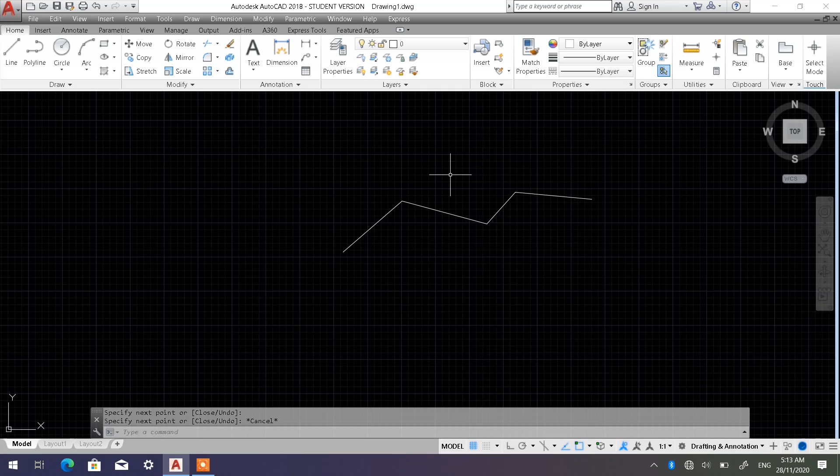Okay, layer ini, okay, layer yang escape to exit from the activity. Layer ini adalah layer yang berwarna putih. Okey. Kalau kita sebenarnya satu saja layer berwarna putih dan nama layer ini adalah kosong.

Sebenarnya kita boleh tambah lagi layer-layer tersebut dengan pergi ke layer properties. Ingat layer ni berada under home tab. Kita ada banyak jenis tab kan? Tetapi layer ini berada pada home tab dan di sini okey, kedudukan layer tersebut. Sekiranya kita nak tambah layer, okey, beberapa layer ni, kita boleh pergi ke sini, layer properties.

Okey, so layer properties manager ni akan terpapar. Okey, di sini seperti mana telah saya katakan kepada anda sebentar tadi, dan saya akan expand this a bit. Okey, so ini color dia white dan jenis garisan ataupun line type adalah continuous.

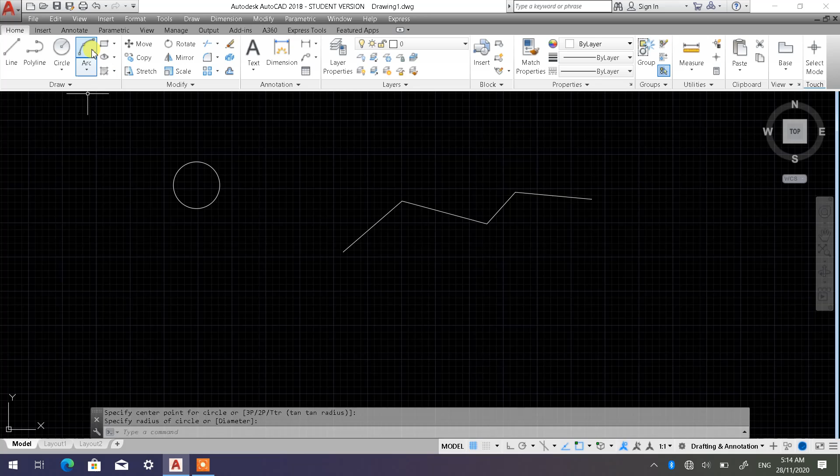Okay, that's why kalau kita perhatikan dia, kalau kita buat circle ke ataupun arc ke, okay, garisan ini adalah merupakan garisan berterusan. Garisan objek ini sebagai objek garisan yang continuous.

Alright, so seperti mana yang telah saya katakan sebentar tadi, sekiranya kita nak tambah lagi layer, we can go to layer properties. Dan kalau diperhatikan pada bahagian atas ni, dia ada beberapa new layer. Kita ada new layer, VP frozen, okay, in all viewports, delete layer, and also set current.

So I just want you to focus on, for the time being, on the new layer. Okay, so new layer mana kita nak tambahkan layer pada bahagian sini. Okay, so let's kata choose this one, new layer, and then you can just leave it as layer 1 or you can rename it. Okay, you can rename it. Let's say I'm going to rename it as let's say green.

Okay, green means that I'm going to change this to, instead of white, I'm going to change it to green. Just click this one and then you can choose any green. I'm going to maintain with this green color. Then once after you choose that particular of color that you want, then just straight away go to OK button. There you are. Okay. It's not necessary to name it as green.

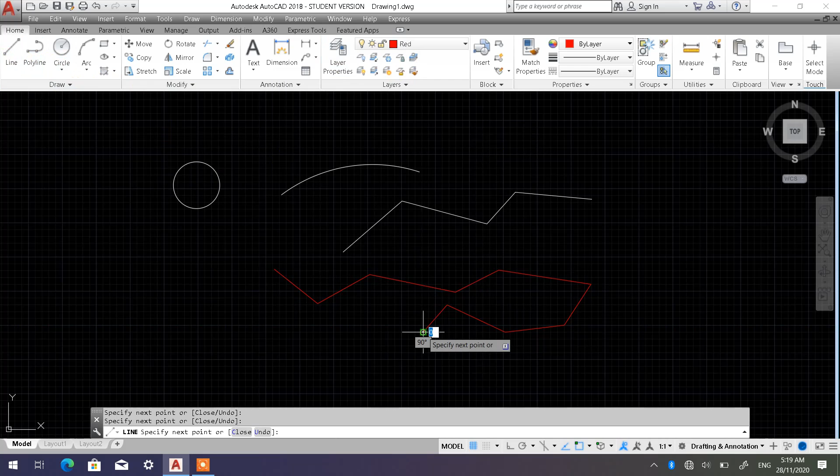So bila you close this, and let's say if you play around with your sketches, dia akan berwarna merah. Why? Because kita dah pilih merah dan continuous, dan juga continuous line. Okay, so you can play around with this one.

Now, cara kedua, itu cara shortcut, ialah very easy. You just need to expand this arrow, click this one, dan pilih terus yang mana you nak. Let's say I'm going to change back to zero layer, zero with continuous line. Just click this one, and then straight away you can play around. Same as well as this one.

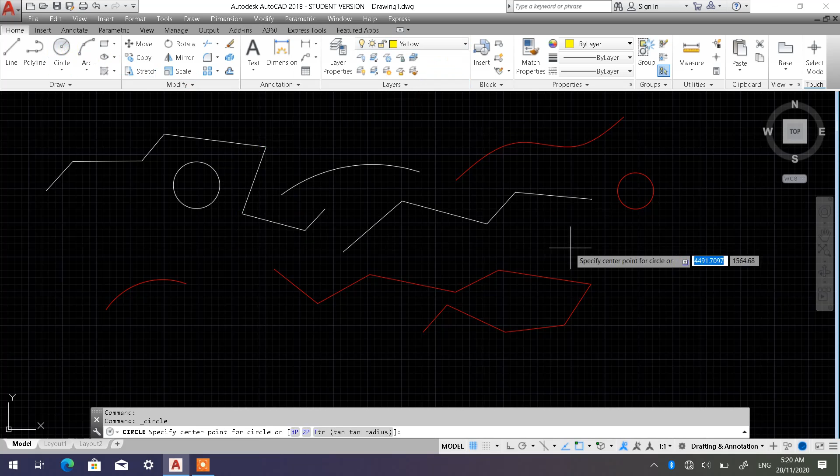Katakan I nak pilih yellow pula, click this one, go to yellow, and then you can play around with those sketches that you would like to create. It's very straightforward. Again, just green, since kita dah buat green kan. Okay, so kita lukis je lah green juga. There you are. So you can have all these, you can try to play around with these layers later on.

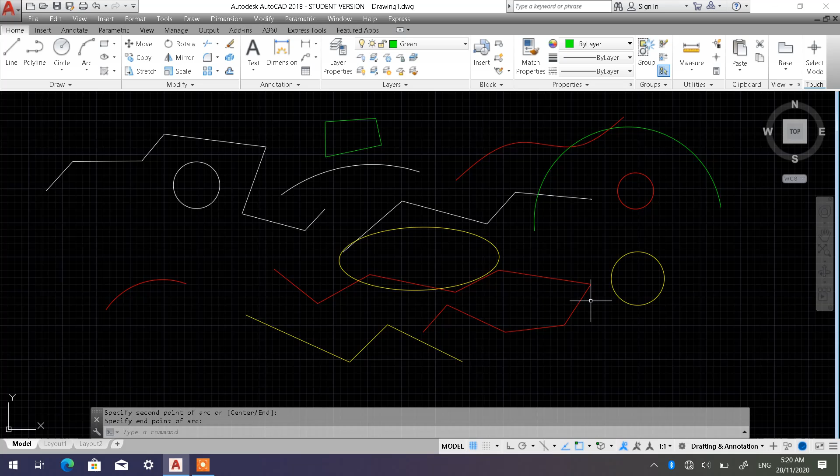Okay, I'm going to shift this to the side first, because I would like to show you how we are going to change the line type. Just now I already showed you how we are going to play around with the layers. As far as you're concerned, this type of line is known as object line, and it is a continuous line type.

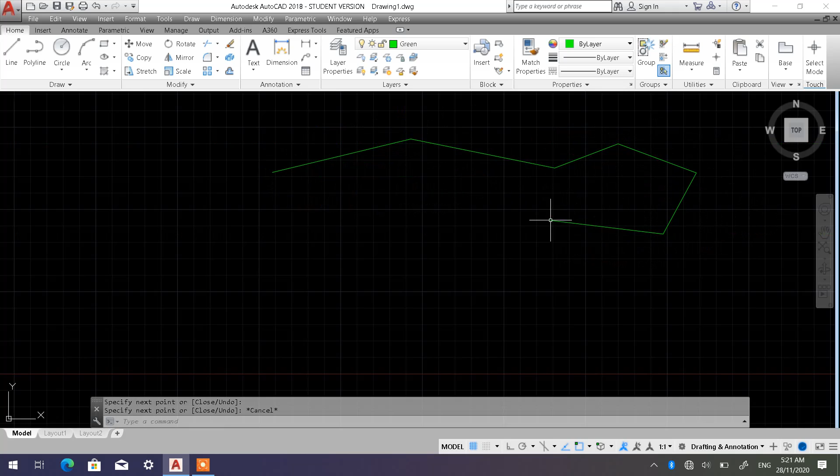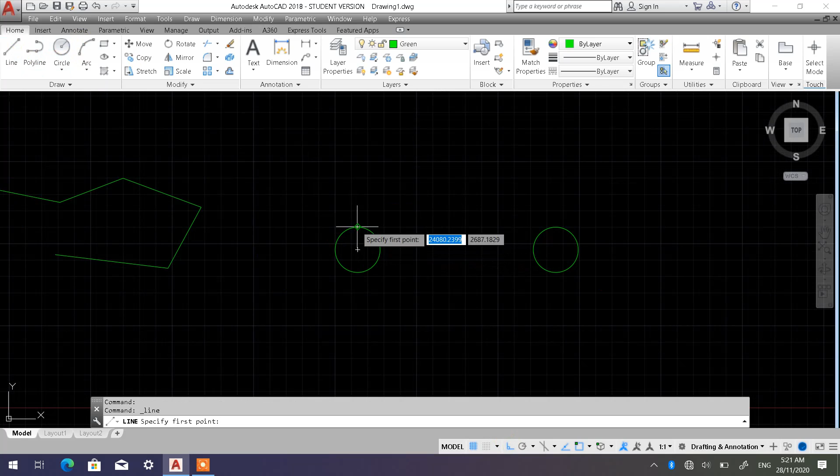So let's say katakan kita nak create, normally kalau kita create a circle like this, I just simply draw without any dimension. And let's say I'm going to copy out this one. I'm going to make sure my ortho is on. Let's say somewhere around here, I just would like to create a simple part like this.

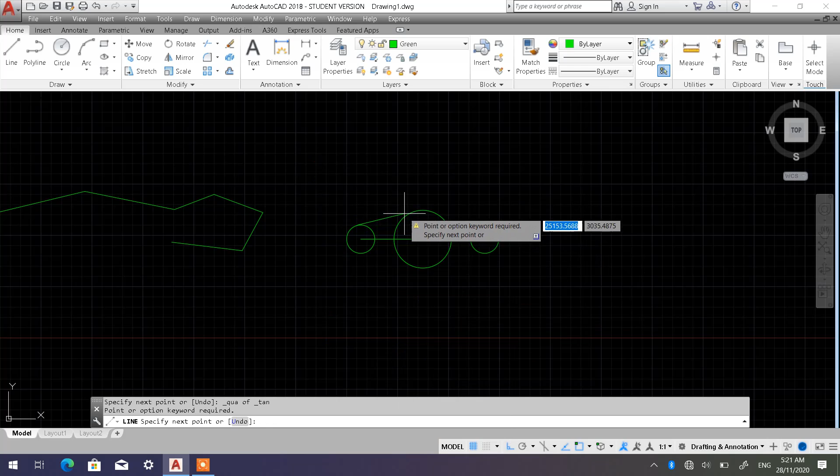And let's see, I'm going to have another circle at the middle of these both circles, and then I'm going to have a line here, tangent, and also tangent. Need to have a tangent here. Okay, press escape, and then I'm going to mirror.

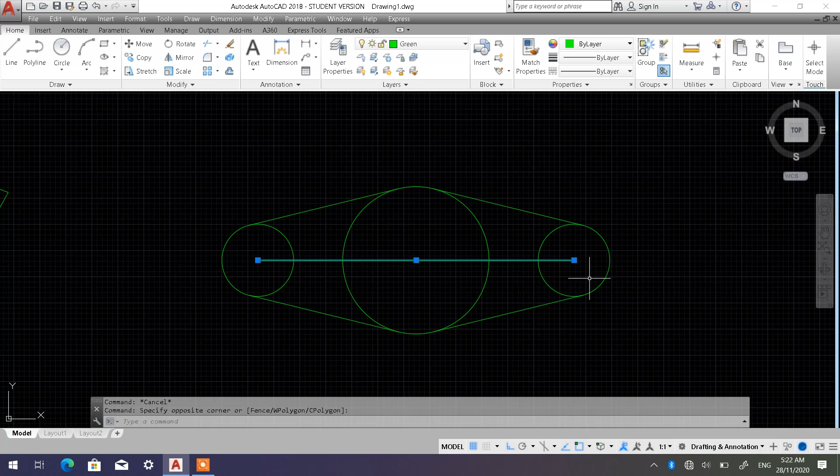I'm going to make it bigger, so it's easier for me to proceed with my activities. And then I'm going to mirror both of these from here to here. Okay, I'm going to eliminate this guideline.

So now, let's say I'm going to create, of course, definitely for those circles, kalau apa-apa yang melibatkan circles di dalam engineering drawing, you need to have a center mark ataupun center garisan tengah bulatan, okay, center marks. Normally there are certain cases whereby in engineering drawing, kalau fillet, you remember we played around with fillet.

Sometimes dia akan letak, dia akan tunjukkan juga center mark. But for me, it is enough if let's say you just show the center marks pada circle penuh lah, pada bulatan penuh like this, alright.

So in order to change the line type, we need to go to layer properties. We can't change it simply here kat sini ni. Shortcut ni kita just nak change type of layer saja. Let's say we would like to change to yellow type of color layers, so we can change here. Just switch, expand this arrow and then switch whatever layers that you want.

However, if you would like to change anything such as the line type, or you would like to create the layers or line type, you can't do it here. So you have to go to layer properties, right? Go to layer properties, and then I'm going to shift this a bit here.

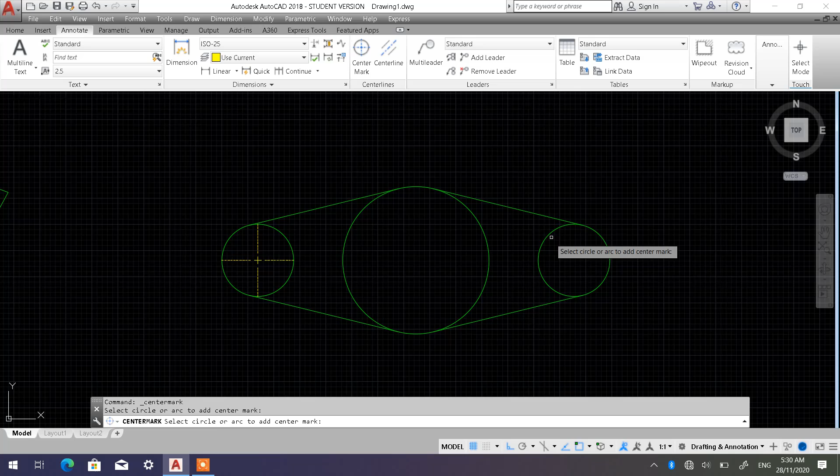Okay, this is the center mark. So you just need to click this center mark, this icon, and then they ask us select circle or arc to add center mark. So you pilih which circle that we would like to create this center mark. Bulatan mana yang ataupun circle mana yang kita nak createkan center mark? Kita nak bulatan ni, kita nak bulatan ni, kita nak bulatan ni. As you can see, nampak? Okay, dia akan terhasil. Dan sekiranya kalau, okay, I would like to press escape to exit from the center mark command, from the center mark activity. So I just press escape.

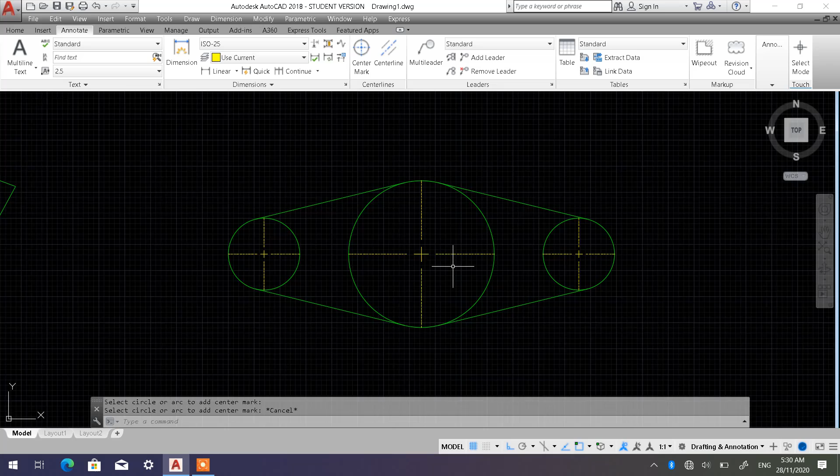Now, kalau you perhatikan di sini, I would like to share with all of you another one more command. Okay, kalau you perhatikan di sini, okay, dia punya size. Ini bukan, I'm not talking about line width. Line width tadi ketebalan. Okay, tetapi I would like to show to you, or I would like to discuss with you the line size. Okay, kalau you perhatikan di sini, dia punya line size dia kecil sangat. So bermaksud dotted line, kalau kita ambil full view of this sketch, okay, sketch yang baru saya hasilkan ni, dia punya ni tak berapa nampak kerana kecil. Okay, dia punya size of this center mark punya line type ni kan terlalu kecil. So what you need to do is that we can change the size. Okay, we can change the size of this particular line type size.

So you just need to bring your cursor here, then you type LT scale. Okay, kalau di data apa di sini, you just straight away can go to here. Okay, alright, go to here LT scale, or you can just simply type penuh lah kat sini pun tak apa. Tetapi kalau saya bila dah type LT je, kalau dia keluar je LT scales, I just click this one, LT scales.

So we will enter the line type scale factor. For the time being, the scale or size of this line is 1. Okay, 1. So let's say we make it a bit bigger. Let's say 5. Let's see how it looks.

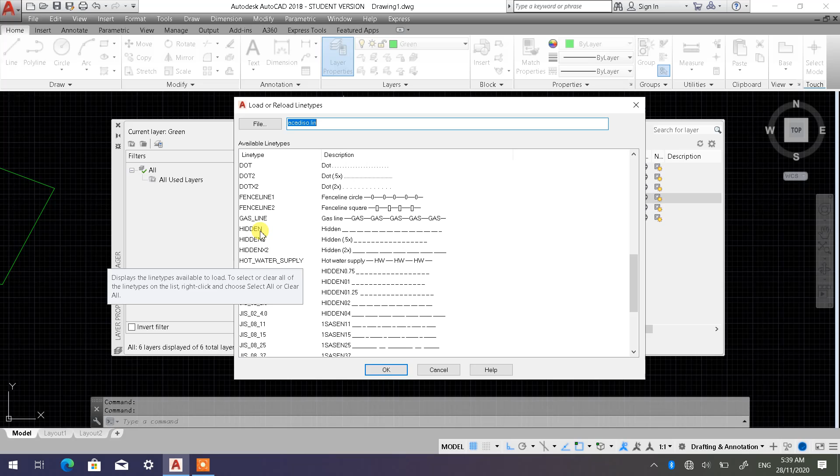Okay, I already reloaded it just now for the center. Okay, then I go to load, and then I'm going to search for hidden. Okay, remember I mentioned just now that since we are in engineering fields, we just need to choose the first type of hidden line, which is this one. Click this one, press OK, and then don't forget to click here, choose hidden first, then click OK. There you are. Okay, so I'm going to make this one as current. You can change here as well if you want to.

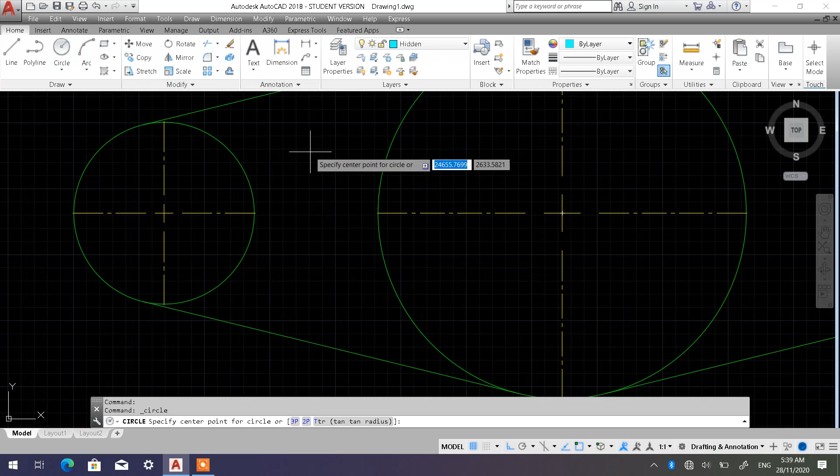And let's say I'm going to have a slot as I mentioned just now. So I just simply draw without any dimension here, and then I'm going to copy this one from here to here again without any dimension. Or let's say I'm going to mirror it instead, much easier. Mirror this one from, let's say, this center point.

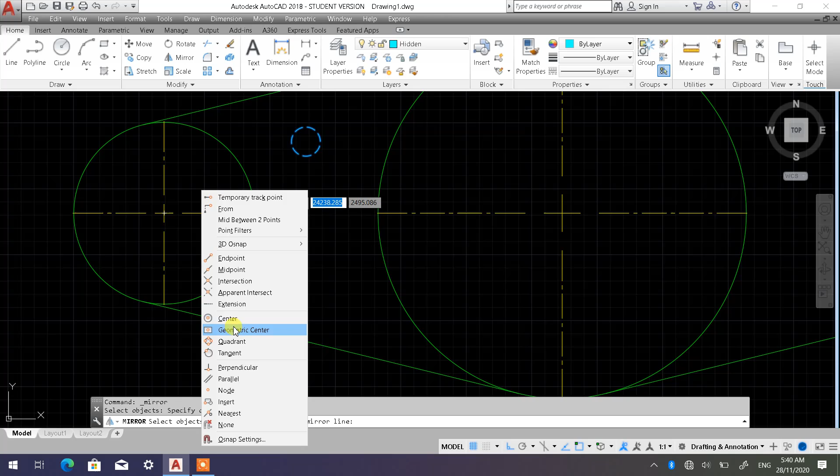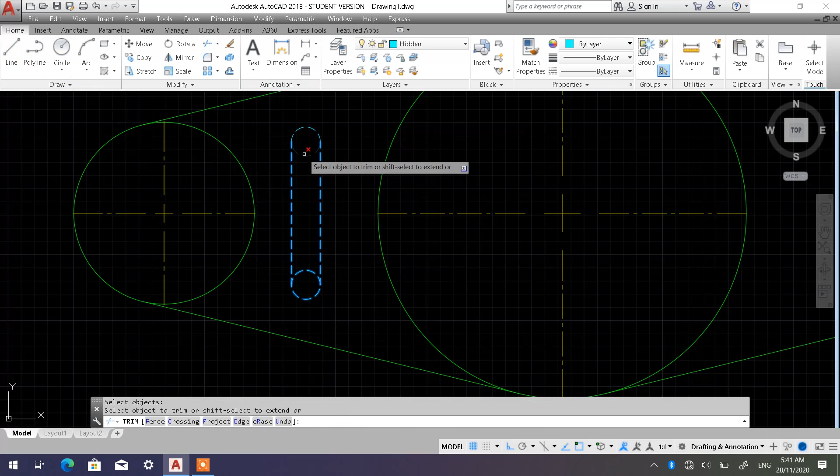A hidden line means we can't see this slot, because as I mentioned just now, the location of the slot is at the bottom of this component, so that's why we can't see this slot. That's why we need to use the hidden lines. Okay, it's a hidden/invisible line. So I'm going to mirror this,

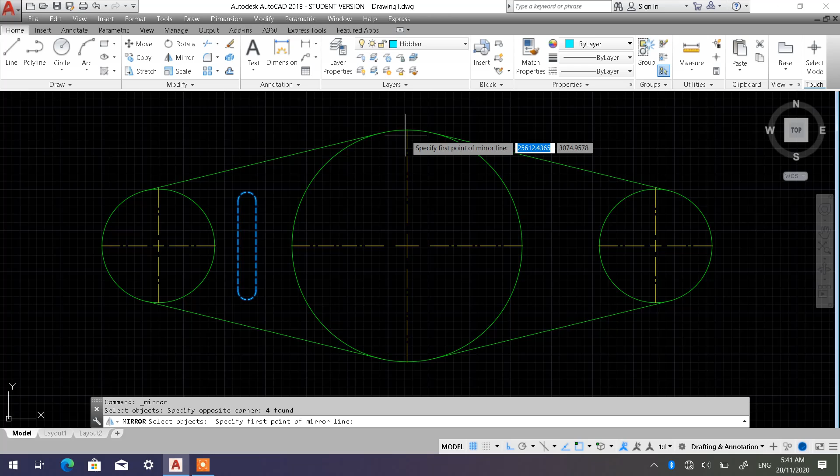Enter, and I'm going to mirror it at this side. There you go. Okay, that is about the hidden lines as well as the center mark.

For your information, these two line types, namely center mark and hidden line, together with the continuous line and object line, are the line types that are the most commonly used in AutoCAD.